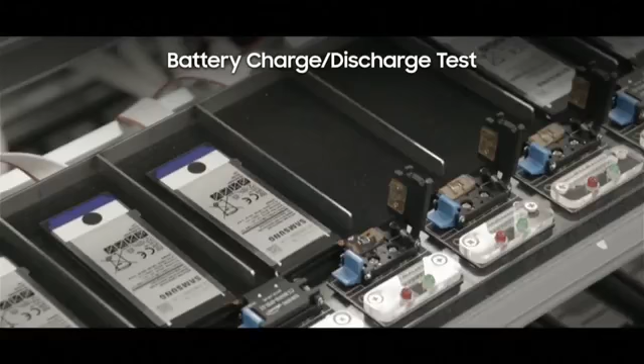In order to replicate the incidents observed in the field, over 700 Samsung researchers and engineers spent several months analyzing more than 200,000 fully assembled Galaxy Note 7 devices, as well as more than 30,000 Galaxy Note 7 batteries. These devices and batteries were subjected to repeated charge and discharge testing. We found that both fully assembled devices and batteries exhibited incidents at similar rates to those in the field.

This indicated that the incidents were caused by the battery cell itself, and we proceeded to focus our investigation on the batteries.

Before getting into the details of the battery analysis, I would like to first explain the basic structure of a lithium-ion battery.

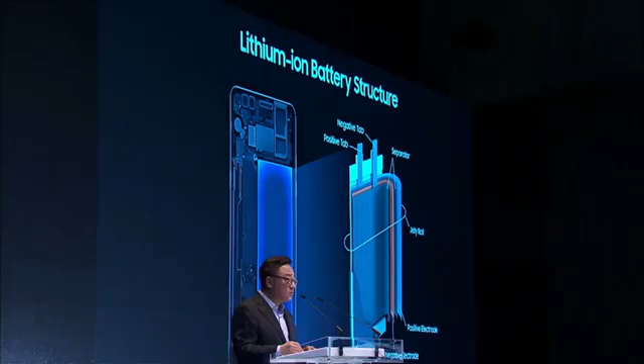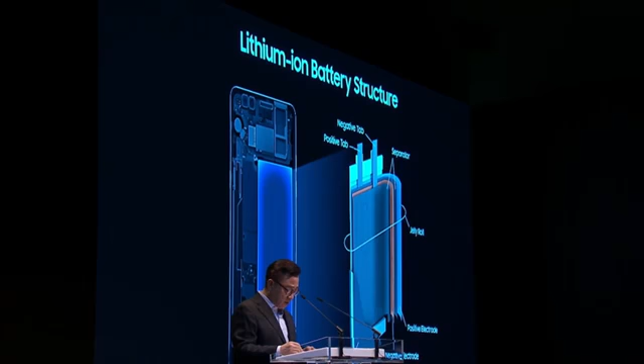A lithium-ion battery is arranged in layers consisting of a positive electrode, negative electrode, and a physical separator between the two electrodes. These layers are rolled into what is called a jelly roll. In general, a short circuit within the battery cell may occur when there is damage to the separator that allows the positive and negative electrodes to meet within the jelly roll.

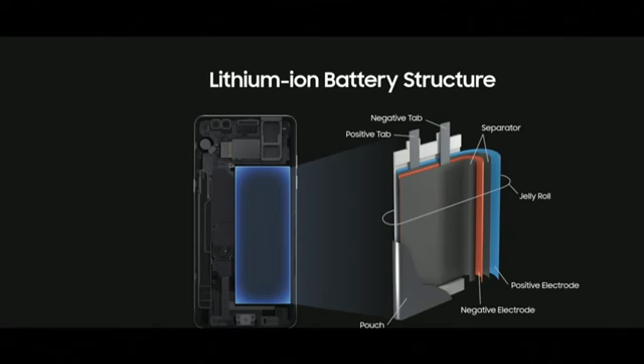Based on a detailed analysis of the affected batteries, both battery A from the first recall and battery B from the second recall, we identified two different factors.

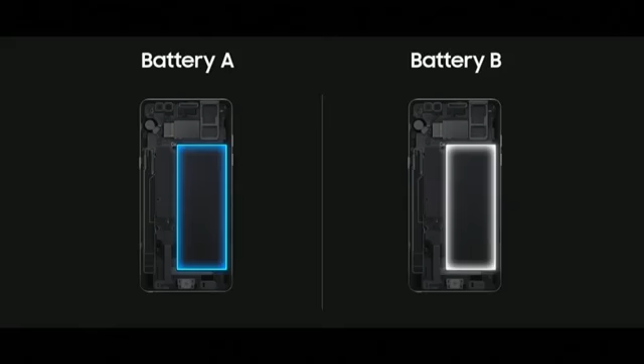As you can see from the CT scan of battery A units, we found that the incidents consistently occurred in the upper right corner of the jelly roll.

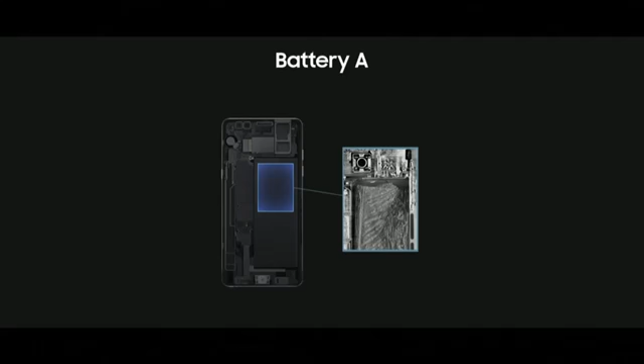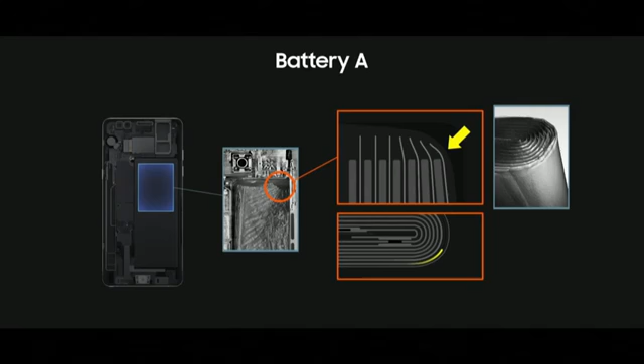Our analysis showed the main cause for the incidents was deflections in the negative electrode. We were also able to confirm that some additional contributing factors, such as incorrect positioning of the negative electrode tip, led to a higher likelihood of incidents.

When we examined battery B, we consistently found melted copper on the negative electrode area facing the positive tab, indicating a short circuit had initiated in that area of the battery.

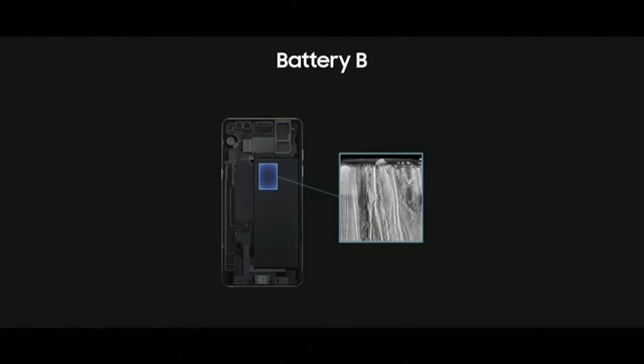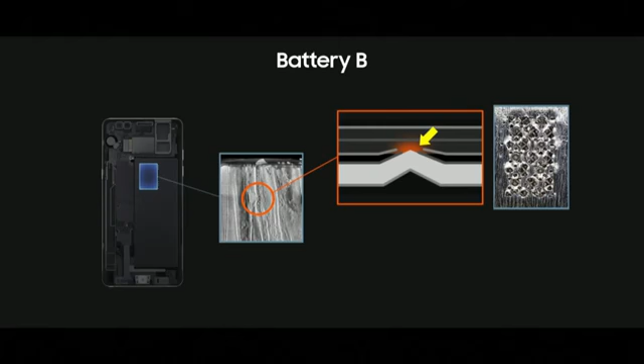Based on our analysis, the main reason for the incident in battery B was an internal short circuit as a result of abnormally high welding burrs that formed during the ultrasonic welding process to attach the positive tab. Due to the high welding burrs, penetration of the insulation tape and the separator resulted in direct contact with the negative electrode. In addition, we found a number of batteries that were missing the insulation tape.

Next, each of the industry experts will share their own independent analysis, apart from us, on the Galaxy Note 7 issue.

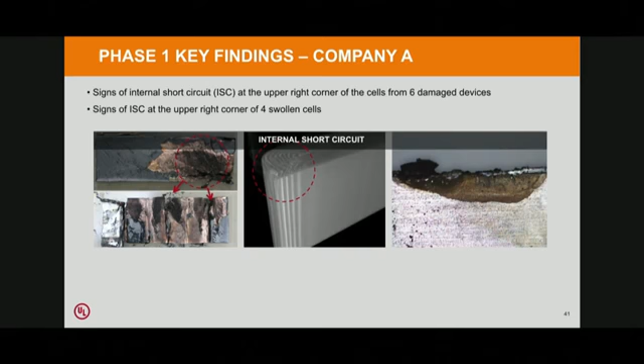These are the key findings of phase 1 for Company A. There were signs of internal short circuit on the upper right corners of the cells from 6 of the damaged devices. We also found internal short circuit at the upper right corner of 4 swollen cells within those damaged devices. For phase 2, we conducted a CT scan of 30 cells and did disassembly of 20 cells.

We found minor anomalies such as small void, bubbles, or uneven stress. The samples also show a similar pattern of deformation on the upper corners. The upper right corner deformation appears to be deeper than those on the upper left. Finally, a teardown analysis shows repeated deformation areas on the separator at the corner locations.

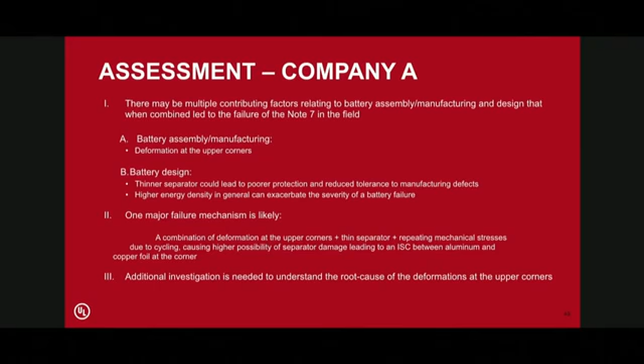Our assessment based on these findings for Company A batteries reflects a combination of assembly or manufacturing issues and also some issues from the battery design. Those issues from manufacturing or assembly relate to deformation at the upper corners, and those from the battery design appear to be the cause of the thin separator, which reduces the tolerance and thereby allows for larger manufacturing defects. The higher energy density of the batteries in general also could increase the severity of a battery failure.

Our assessment for Company A further suggests one major failure mechanism for the likely possibility of a field incident. This was a combination of the deformation at the upper corners, the thin separator, plus the mechanical stresses due to cycling, which causes higher damage, leading to the possibility of separator damage, and an internal short circuit between the aluminum and copper foil at the corners. Additional investigation is needed to understand the root cause of the deformations at the upper corners of the batteries.

For Company B, the scope of project was in 3 phases. Phase 1 was a field event sample analysis where we tore down 10 damaged Note 7 devices with Company B's batteries to understand the failure mechanism and potential causes of failure. Phase 2 was a system-level compatibility characterization where we tested 40 new Note devices with Company B's batteries under various conditions to determine whether the device itself contributed to the battery failure.

Phase 3 was a battery safety boundary characterization where we studied the battery failure mechanisms on 354 new Company B batteries under various abuse conditions to identify potential battery safety issues. For Company B batteries, the phase 1 key findings were signs of internal short circuit at different locations of the cells from 5 of the damaged devices.

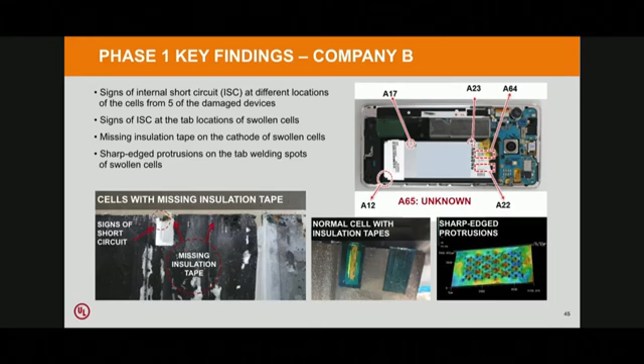We also had signs of internal short circuit at the tab locations of the swollen cells. There were also missing insulation tape on the cathode of the swollen cells. And finally, we observed sharp edge protrusions on the tab welding spots of the swollen cells.

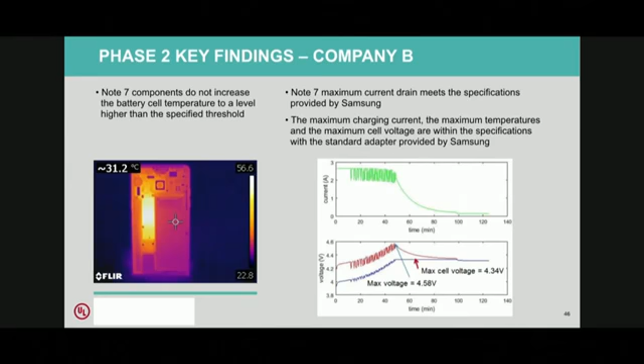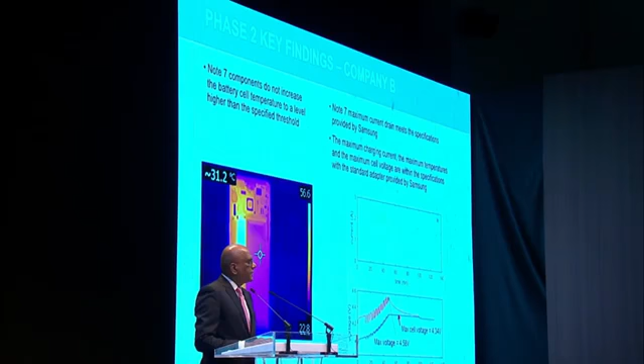Phase 2 had the following findings. It was clear that the Note 7 components did not increase the battery cell temperature to a level higher than the specified threshold, and that the current drain met the specifications as provided by Samsung. The maximum charging current, the maximum temperature, and the maximum cell voltage were all also within the specification with the standard adapter provided by Samsung.

For phase 3 of Company B batteries, we found that the failure mode observed in the field event samples can be reproduced by UL's internal short circuit tests or localized heat pad tests. The flaws were readily found from 3D CT scan of some of the samples. The teardown analysis showed uneven charge status on multiple samples, signs of internal short circuit, poor alignment and inconsistent shape and dimension of tabs and insulation tapes, and finally, sharp edge of welding joints.

For Company B, we found no evidence of device-level incompatibility issues that may have contributed to the failure of the Note 7 in the field. There may be multiple contributing factors related to production quality and battery design that in combination led to the failure of the Note 7 in the field.

The production quality issues were missing insulation tape on the tab, which could result in a higher possibility of internal short circuit, bigger protrusion of welding joints in the tab, which could lead to a higher possibility of separator puncture and thereby an internal short circuit, and misalignment of insulation tape and/or tab, which could also increase the risk of an internal short circuit.

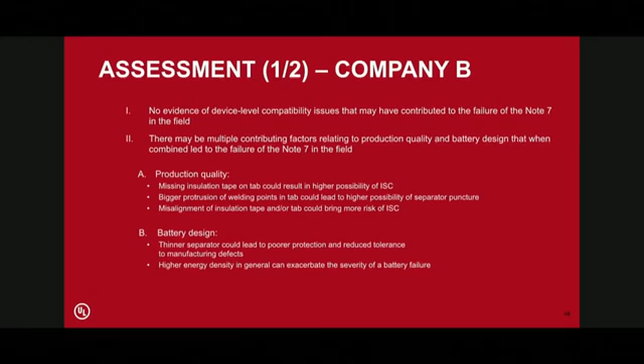Contributing factors from battery design were thinner separator, which could lead to poorer protection and reduced tolerance to manufacturing defects, and higher energy density of the batteries in general, which can increase the severity of a battery failure. Our assessment further suggests that one major failure mechanism for field incidents is likely.

That is a combination of missing insulation tape and sharp edge protrusions on the tab, combined with a thin separator, with all three leading to a high possibility of an internal short circuit between the cathode tab and the anode, subsequently resulting in heating and fire. Our further conclusion is that we need additional analysis to understand the root cause of the damage to the edge or corner of the battery, which results in internal short circuit at that location.

In summary, design and manufacturing issues with the batteries led to field failures of the Note 7 devices. Thank you.

The Exponent team devised and executed a suite of destructive and non-destructive tests that were applied to failed cells and devices recovered from the field, and to new unused cells and devices that were provided to Exponent by Samsung. In addition to the work that was focused on determining the issues with the lithium-ion cells, Exponent conducted an analysis of the device and accessory electronics that were related to the overall energy storage system of the Note 7.

It's important to note that the proposed root causes are consistent with the data collected during this investigation, and that care was taken to adhere to generally accepted scientific and engineering principles during the conduct of this work. The path of the investigation was defined by objective measurements, assuring an independent and impartial analysis. Before we discuss our findings and conclusions, I'd like to take a minute to introduce some of the important aspects of the lithium-ion cells that we will be discussing.

This type of lithium-ion cell is most often called a pouch cell. The active portions of the cell are protected by a polymer pouch that is heat-sealed. Inside the pouch are the positive electrode, the negative electrode, and the separator membrane, which keeps the positive and negative electrodes from touching each other. Contact to the electrode assembly is provided by the electrode tabs, which are welded to the metal foils of the electrodes. The coated electrode foils and separator are long strips that are spiral wound to form the electrode assembly.

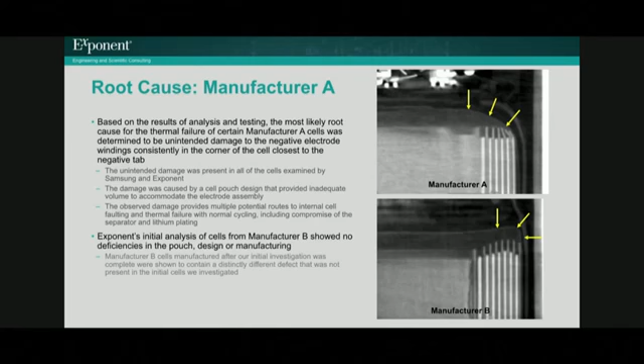Negative electrode damage like this is undesirable because it can put strain on the separator, causing separator failure and cell faulting. Or it can cause negative active material delamination that can upset the local capacity balance, resulting in plating and potential cell faulting. Cell faulting is a well-known route to the types of thermal failure that were seen in these cells. This evidence was sufficient for Samsung to trigger a recall of the devices equipped with cells from manufacturer A.

As part of this initial work, Exponent was asked to perform an analysis of cells from manufacturer B because they were intended to replace the cells of manufacturer A. Through this analysis, we found that manufacturer B cells did not share the pouch design problem with the cells of manufacturer A, and that the cells available at the time of our investigation were free of other common design or manufacturing defects. Unfortunately, that is not the end of the story for manufacturer B cells. Exponent later found that a new and distinctly different manufacturing defect was present in manufacturer B cells that were manufactured after our initial investigation.

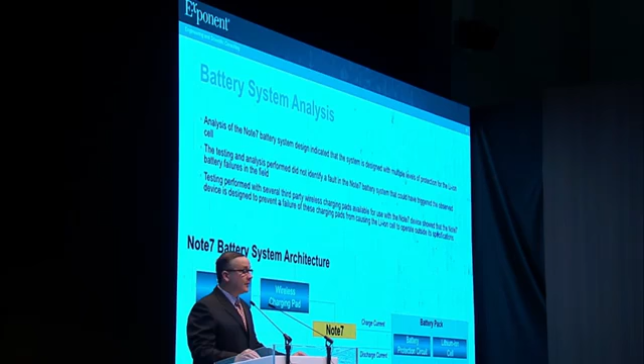The important take-home message of this work is that the electronics did not contribute to the failure of either manufacturer's cells. Thank you very much for your attention.

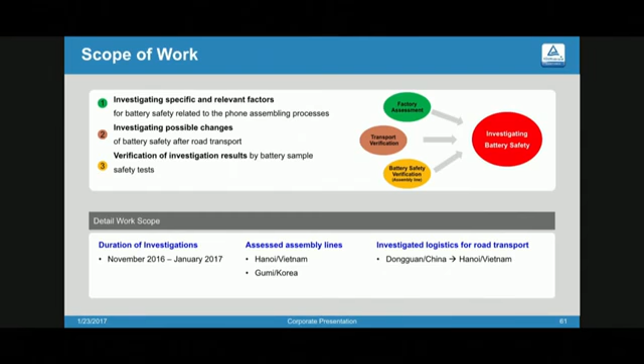Our investigation included investigating the battery safety related to processes of the Hanoi and Gumi phone assembly lines, performing safety tests on battery samples from assembly lines, and the investigation of possible effects on the safety of the batteries after road transport from China to Vietnam. The investigation for the factory assessment took from November 2016 to January 2017.

Samsung Electronics Vietnam prepares a sub-assembly which is sent to Samsung Electronics Gumi, where final assembly, packaging, and distribution takes place. We investigated battery safety aspects of both factory lines.

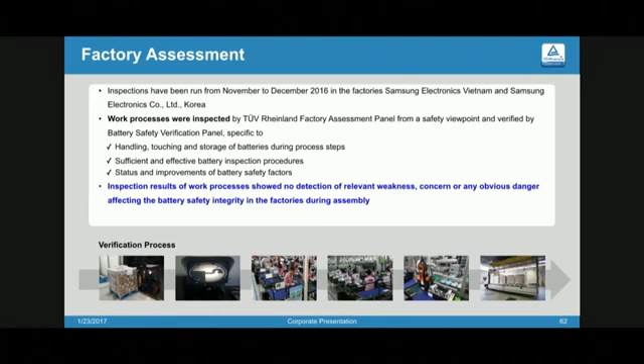Inspections and documentations were based on the International Factory Inspection Standard format CIG 023. Work processes were inspected by our factory assessment team with respect to safety. Then, an additional assessment was performed by our battery safety verification expert team specific to 3 different areas: handling, touching, and storage of batteries during process steps, sufficient and effective battery inspection procedures including dimension checks, and the status and improvements of battery safety factors.

The inspection of the work processes did not show detection of relevant weakness, concerns, or any other obvious danger affecting the battery safety integrity in the factories during the assembly.

About the logistics assessment: the environmental and mechanical stress during the transport from China to Vietnam was measured by preparing 2 pallets of the battery type in original transport conditions with instruments measuring temperature, humidity, strain, acceleration, and geographical position. The gathered data was analyzed and test patterns were established to allow the simulation of actual transport conditions in a laboratory environment.

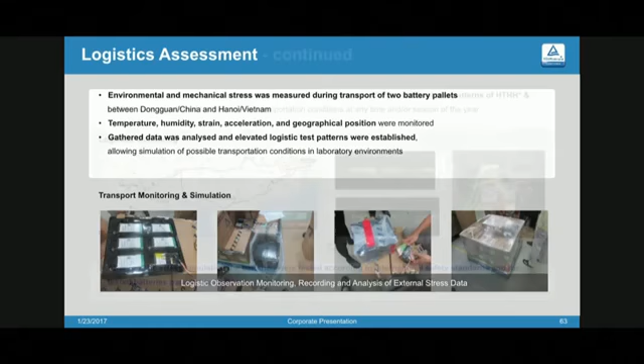In order to evaluate the possible maximum stress caused by high or low temperature and high or low humidity, additional test patterns were developed for any transport condition at any time and at any season of the year. After these stress simulations, the batteries were tested in 3 different test patterns. According to the relevant regulatory requirements of UN 38.3 and IEC 62133, the batteries have passed these tests.

For the verification of the assembly line and logistics assessment, we tested 500 samples of the battery type. These were drawn at 5 locations along the supply chain from China, Vietnam, and Korea. Furthermore, 150 units were drawn from the transport route China to Vietnam. The samples were tested according to the aforementioned standards.

In addition, batteries with intentionally disconnected protection circuits were tested for their safety behavior by means of overcharge, short circuit, and thermal exposure. These tampered samples showed safe behavior under the abuse conditions and in normal use environment.

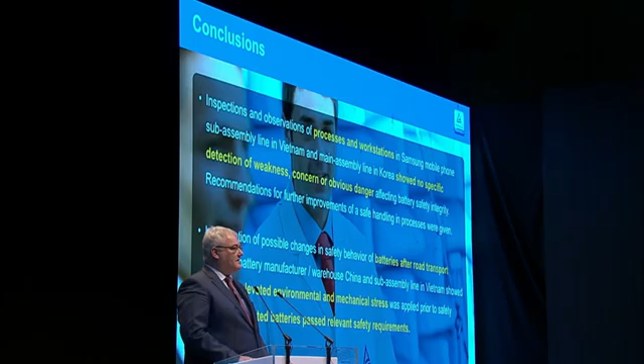We have heard from the 3 third-party organizations about their findings. As you know, these investigations were conducted independently of Samsung Electronics. Now we will hear from Mr. DJ Koh about the preventative measures.

So far, we've shared our own findings, and the industry experts have shared their analysis and findings as well. Battery usage has increased with the growing use of multimedia, and at the same time, smartphone designs have become more compact to cater to mobility.

It was important to support the various multimedia and functionalities, so from the product planning stage, high battery capacity was among the most important factors. The Note 7 was designed for a much larger battery of 3,500 milliampere-hours in a more compact form compared to previous Note models.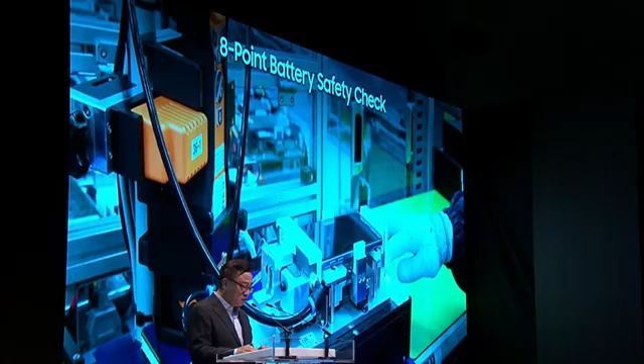During the assembly of a device, our safety checks include large-scale charge and discharge tests of batteries and devices to detect any issues by using special equipment, such as the rare issues that we saw with the Note 7. And once assembly is complete, we conduct intensive testing that simulates two weeks of continuous use across a full range of customer scenarios.

In addition, we are implementing improved training programs and management procedures for everyone involved in the handling of the batteries, from the component level to shipments.

In addition to the 8-point safety check, we have implemented multi-layer safety measures to further put safety first from the product planning stage. At the battery design layer, we have adopted and provided preventative measures to identify and address potential device safety vulnerabilities with improved safety standards for the battery.